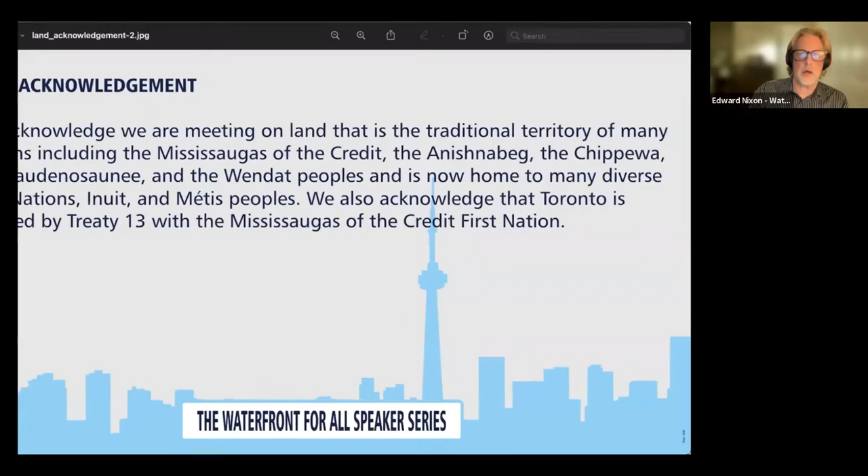We acknowledge we are meeting on land that is traditional territory of many nations, including the Mississaugas of the Credit, the Anishnabeg, the Chippewa, and the Haudenosaunee, and the Wendat peoples, and is now home to many First Nations, Inuit, and Métis peoples. We also acknowledge that Toronto is covered by Treaty 13 with the Mississaugas of the Credit First Nation.

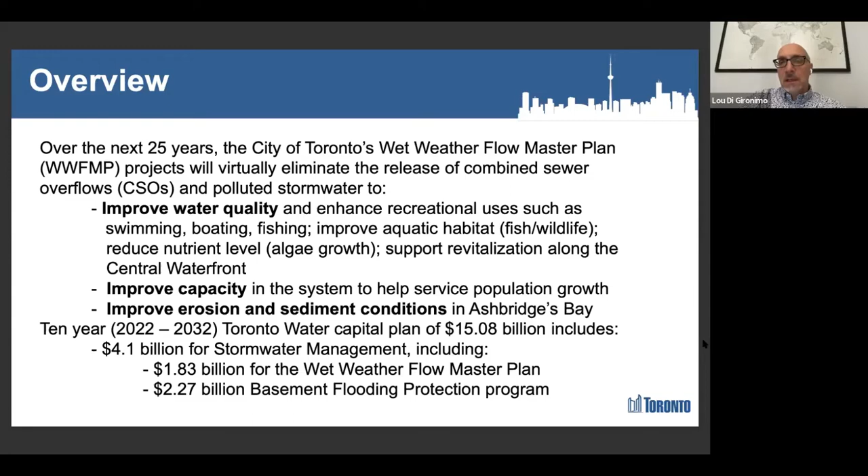The Toronto Water Capital Plan and Budget was just approved by Council in December. The new 10-year capital plan that Council approved is about just over $15 billion of work. As you saw in the introduction, we deal with drinking water, wastewater, and stormwater. Tonight I'm going to focus specifically on the stormwater components. In that $15 billion over the next 10 years, $4.1 billion has been allocated for stormwater management, with $1.83 billion going towards the wet weather flow master plan, and $2.27 billion directed to the basement flooding protection program. So next slide.

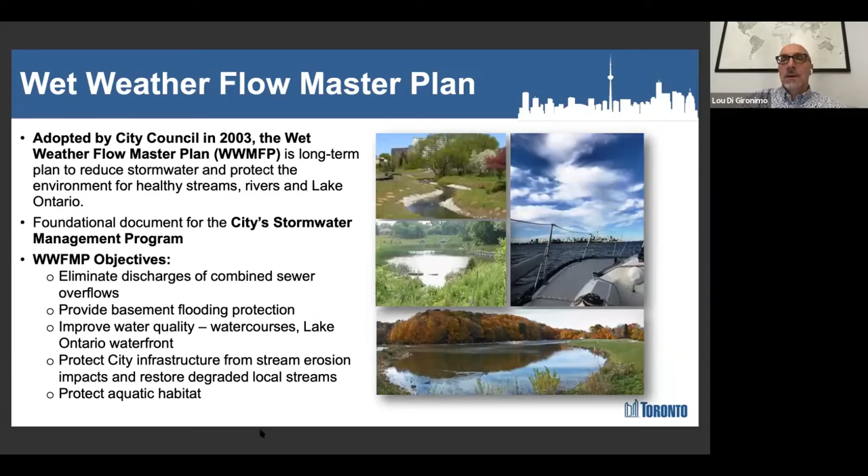The master plan, the original plan, was adopted by Council in 2003. It was always intended to be a very long-term plan with significant investment required over the years, and it became a foundational document for all our stormwater management programs throughout the city. It's designed to eliminate discharges of combined sewer overflows. It was also at the beginning dealing with basement flooding, but at a much smaller level. With storms in 2005, 2007, 2009, and subsequent storms that flooded more homes, Council significantly expanded that component of the wet weather flow master plan, which is why you see the number split between wet weather flow projects and basement flooding.

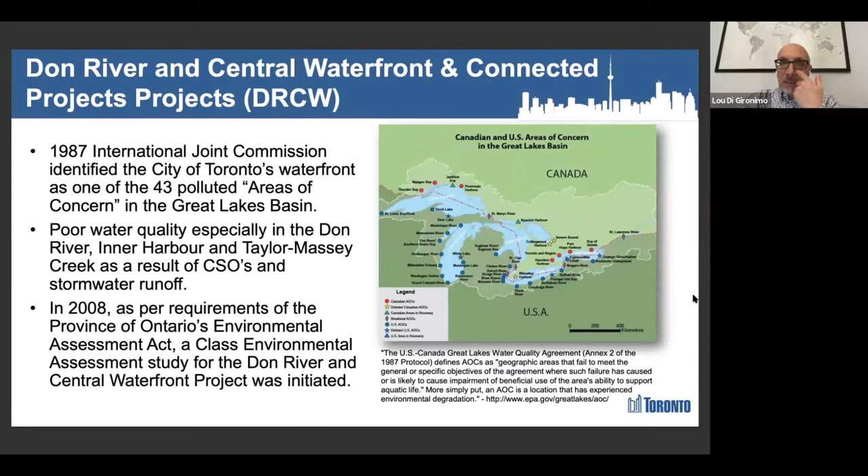The whole purpose of the wet weather flow master plan, and what we're going to focus on tonight as a component of that larger master plan, is the Don River and Central Waterfront connected projects. These projects are built out of an environmental assessment we did in 2008, focused specifically on trying to get the Inner Harbor delisted as an area of concern, as identified back in 1987 with the International Joint Commission. We believe that once all the work is completed, the quality of the water at the Lower Don and in the Inner Harbor will allow us to apply for delisting. Next slide, please.

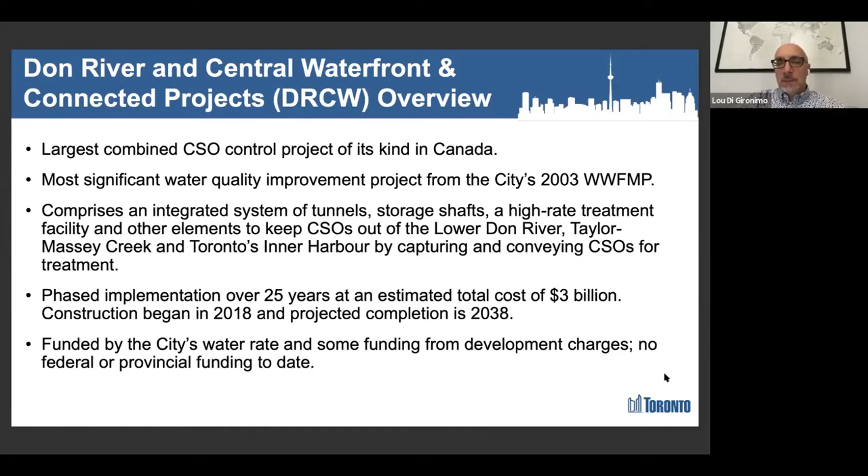The series of projects you're going to see tonight is the largest combined sewer overflow control project of its kind in Canada. It's the most significant water quality improvement project within the Wet Weather Flow Master Plan. It comprises a series of integrated tunnels, storage shafts, high rate treatment facilities, and other elements to keep combined sewer out of the Lower Don, Taylor Massey Creek, and the Inner Harbor, by capturing it and conveying it over for treatment. It was always planned as a phased implementation because of its order of magnitude. These projects total $3 billion, funded by the city's water rate with some funding from development charges. To date we've not received any federal or provincial funding towards these projects, although we continue our dialogue particularly with the federal level of government. Next slide.

Now, why do we keep talking to the senior levels of government? As I mentioned, the work that Toronto is proceeding with, and that we have earmarked and budgeted in the long run in our capital plan, is designed specifically to deal with priorities and initiatives that the federal government and the provincial government have identified many years over and over again.

These were Government of Canada obligations that they have with the US under an intergovernmental agreement to improve Great Lakes water quality. Tied to that Canada-US Great Lakes agreement is an agreement signed by Canada and Ontario, because Ontario is the lead on helping do the work within the Great Lakes Basin, particularly Lake Ontario and Huron. We were successful in this iteration of the renewed Canada-Ontario agreement to at least get mention of these sets of projects in the document. No funding with it, but at least we got mention.

So you can look into that document on page 47 and see that the federal government and the provincial government agreed to continue to promote funding of these infrastructure projects to move towards delisting those areas and having them removed off of the area of concern list.

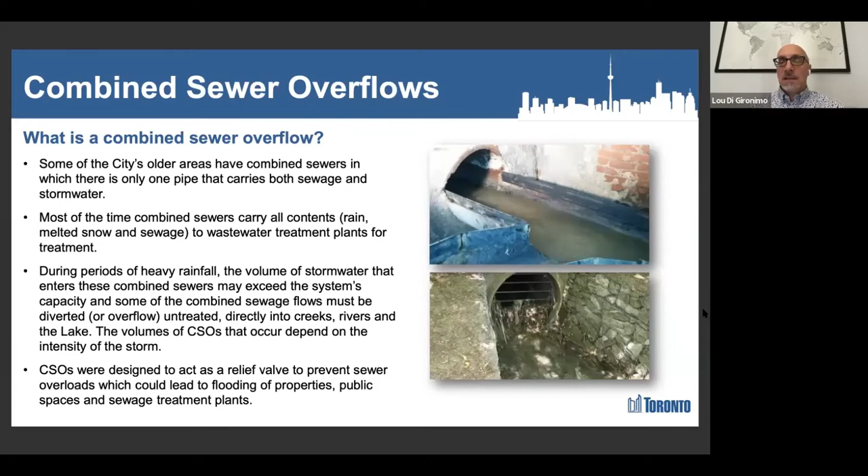Most of the time, that combined sewage flows into our treatment plants and gets fully treated at Ashbridges Bay, and the Humber plant also has some flows. However, during periods of heavy rainfall, when we see significant amounts fall, the system was designed to overflow, and it does. Think about it like a bathtub - the bathtub fills up and holds a significant volume of water. However, when you have too much water coming in too quickly, that bathtub starts to overtop, and that's what happens with these sewers. It was designed to act as a relief valve to protect property, so we don't have flooding in downtown properties and public spaces, and also to protect sewage treatment plants so they don't flood out and get damaged during these extensive rainstorms.

If we take a quick look at the sewer infrastructure, as I mentioned, combined sewers typically happen in the older parts of the city. We have 11,000 kilometers of sewer, but only about 1,500 kilometers are combined - 110 kilometers of storm sewers receiving combined sewer overflows during heavy rain. However, there are 310 locations spread throughout the city where the combined sewer overflow has regulators.

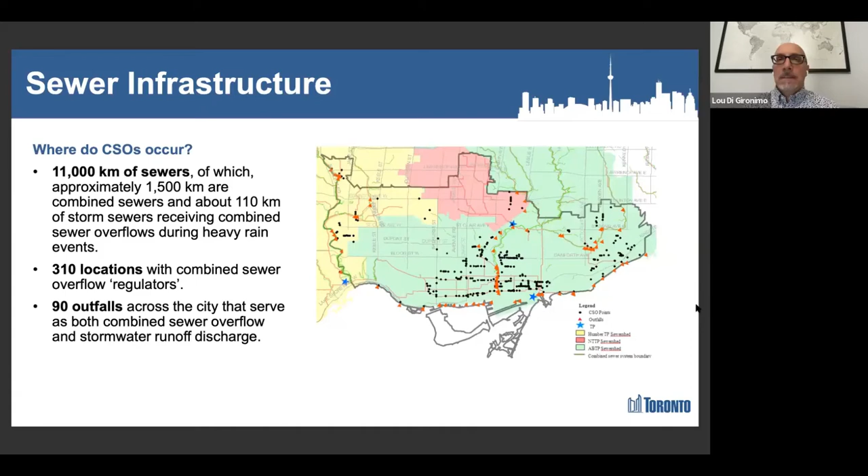So what are the impacts of combined sewer overflows? Well, the discharge contains nutrients and harmful bacteria and pathogens. They can contain some heavy metals, oils, pesticides, and other contaminants that you typically find in domestic sewage. Combined sewers contribute to the degradation of surface water quality in the Don River and in Toronto's central waterfront. The nutrient enrichment causes harmful algae growth in parts of the shoreline and in the lower Don, and has an adverse impact on fisheries and the health of aquatic biota and their habitat.

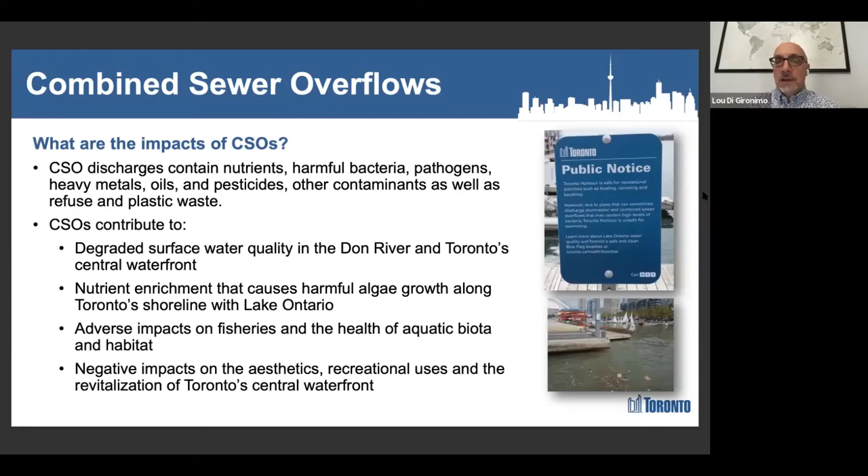So other negative impacts include the aesthetics. It impacts recreational uses, and is not a pleasant thing for the revitalization efforts for Toronto's central waterfront.

So how are we going about addressing this issue? The wet weather flow master plan essentially has two very large projects associated with it. The first is the Don River and Central Waterfront wet weather flow system, essentially three large tunnels, and I'll walk you through that. The second component is a landform project we've done jointly with the Toronto Region Conservation Authority.

It's to address some erosion issues by Ashbridges Bay, but it also will be the home of a future high-rate treatment facility that will treat the combined sewer overflows after we build the tunnels.

In addition to that, there's other work underway because it's all part of the same system. Other environmental assessments completed at Ashbridges Bay led to the development of a new integrated pumping station that services not only the new combined sewer overflow coming from these tunnels, but also helps us decommission the old pumping stations currently north of Lakeshore. Those will no longer be used in future and will be integrated into this new pumping station, which will handle dry weather flows, normal sewage, as well as the wet weather flow situation.

There's also a new outfall pipe being built, with larger capacity and better diffusion capability for improving discharge into Lake Ontario, as well as a new ultraviolet disinfection system, which will effectively eliminate the use of the chlorine tanker cars we have at Ashbridges Bay. We will still have to have some sodium hypochlorite in case we have to do secondary bypasses, but the primary source of disinfection in future will be ultraviolet disinfection. So we will significantly reduce the amount of chemicals we use before we discharge into Lake Ontario.

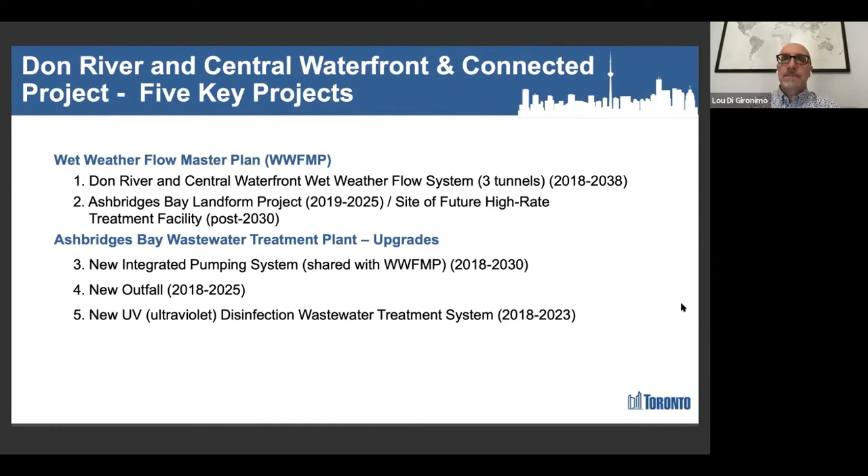So if we take a look at the Don River and Central Waterfront and connected projects, what area is it servicing within the city? It's essentially the central core, all the way up to Steeles Avenue. It services approximately 1.2 million people today, and we know that a lot of the high growth areas within the city are contained within this study area, so it will also handle continued population growth that we're seeing throughout this core.

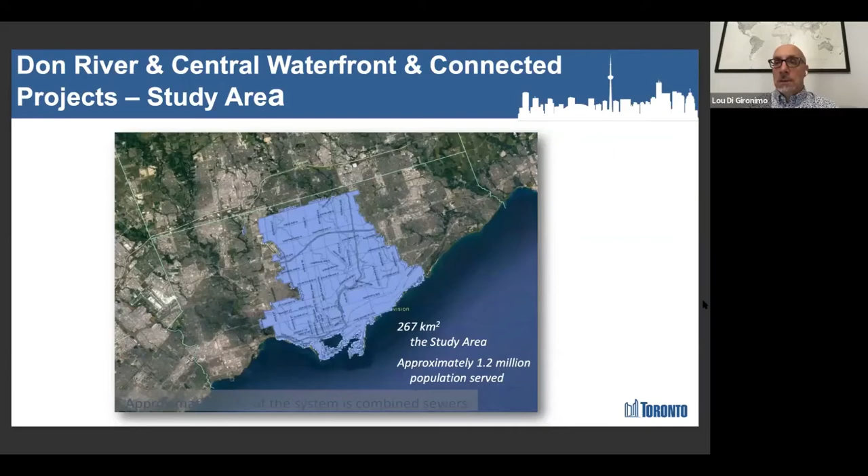So the specifics of the first set of large projects, the Don River and Central Waterfront wet weather flow tunnel system, is comprised essentially of 3 different stages. The red line you see is what we call the Coxwell bypass. That project is underway right now and being constructed. It is about 10.6 kilometers in length. The total system will be 22 kilometers in length, because that tunnel will continue with a smaller diameter tunnel working its way along Taylor-Massey Creek eventually, picking up additional combined sewer overflows.

And then another more important one is the Inner Harbor West Tunnel, which will be built also in a subsequent phase. It runs right across the Inner Harbor and connects at the western point to the existing Western Beaches system that we have in place and have been operating for the last 20 years.

So ultimately, when constructed, we will have tunnels protecting combined sewer overflows and storm overflows stretching from Sunnyside Beach all the way over to the treatment plant. Those stars you see are the locations where drop shafts will go in and pick up those overflows. If you remember that earlier slide where I talked about combined sewers eventually discharging into our tributaries, that's what those star locations are. We have to pick up that overflow and drop it down deeper into that tunnel.

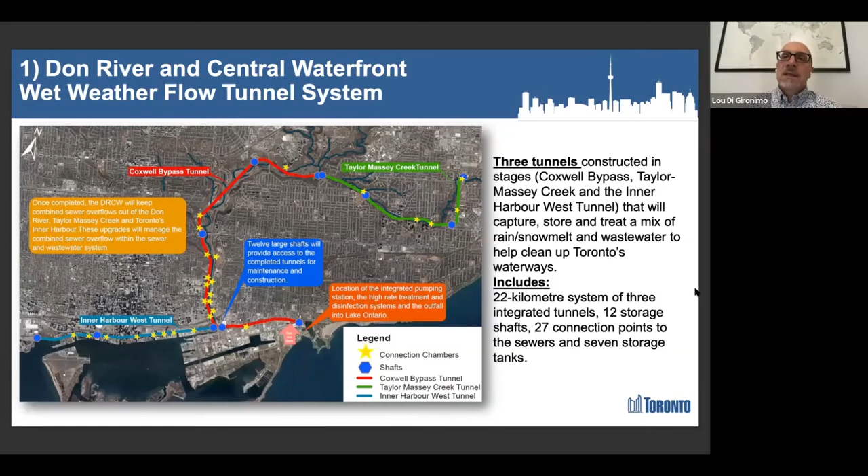The tunnel is being built. If you go on the next slide, you're going to see some of the pictures we've got underway with construction. Please advance another slide.

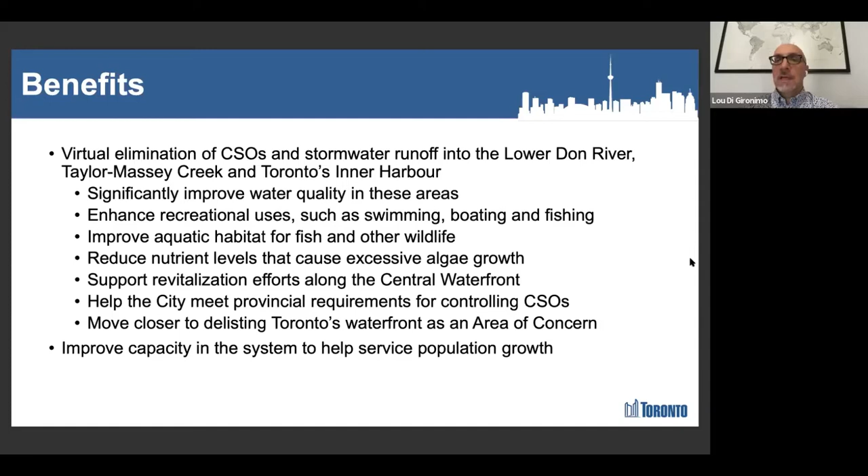So I talked about some of the benefits. It's going to eliminate the combined sewer overflows and stormwater runoff from the Lower Don, Taylor-Massey Creek, and the Inner Harbor, all leading to improved water quality, enhancing recreational uses such as swimming, boating, fishing, improving aquatic habitat for fish and other wildlife, reducing nutrient levels, everything that we talked about. These tunnels are intended to address all of those concerns, as well as improve capacity in the system to service future population growth.

If we go to the next slide, these tunnels are quite large, 6.3 meters in diameter. The Coxwell bypass in particular is interesting because, even though it's running through the Don River, it does connect at the top of the Coxwell sewer. The Coxwell sewer runs straight down by gravity from a location in the ravine into the treatment plant.

That sewer was put into service in 1960 and it cannot be taken out of service. We had to do an emergency repair on that sewer back in 2009, 2010, and it was quite expensive, costing us over $40 million to fix a segment of that sewer.

To be able to continue to maintain that sewer in future, you need to be able to bypass those flows and redirect them temporarily while you do maintenance work. The combined sewer tunnel we're building on the Don will act primarily as a combined sewer capture system, but it can also be used to bypass the Coxwell for a period of time, so we can isolate that sewer, get in there and do maintenance work, and then revert the flow back to the Coxwell sewer. So it's going to do dual duty.

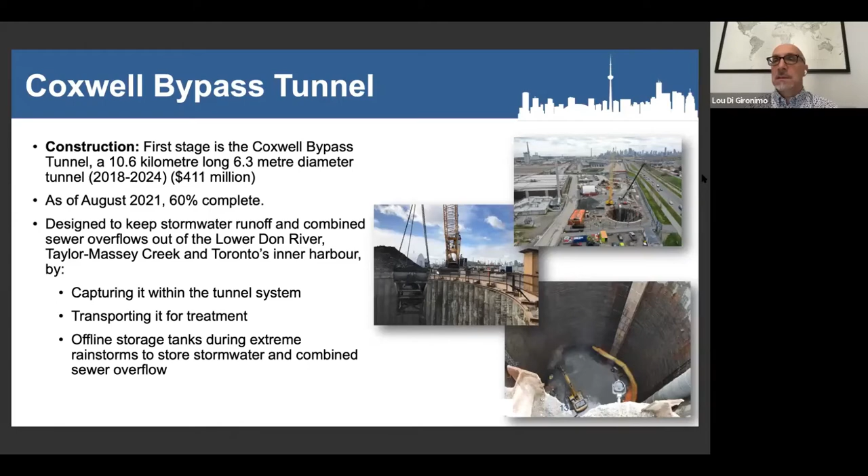It's about 60% complete and about 50 meters deep as well. So that's what you're seeing in some of these pictures, with the storage shaft looking straight down. This is one of the entry shafts we have, and it runs about 50 meters all the way along.

The Coxwell sanitary trunk sewer is the system that we will be able to bypass. Why is it so important? It's the most critical sanitary sewer we have in the city. It carries sewage for over 750,000 residents and businesses. As I mentioned, it has never been out of service, and you can't take it out of service until this bypass is built. The new tunnel will enable that redundancy to happen and give us greater protection for the city on a go-forward basis.

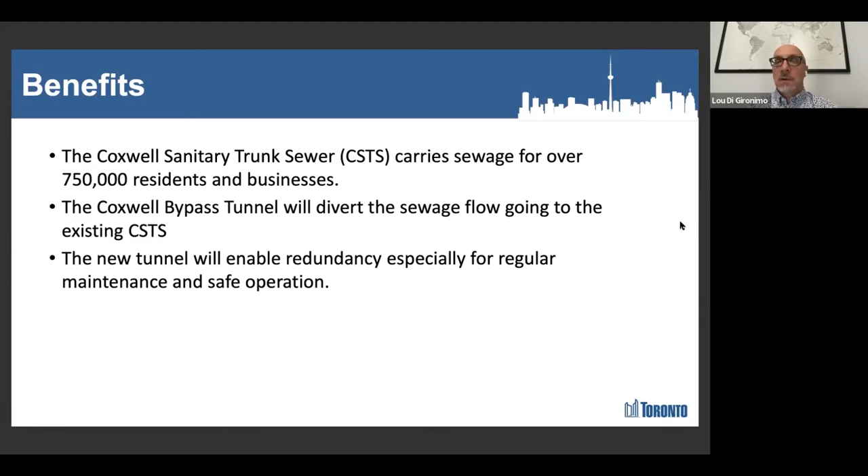Those starred locations, those outfalls, are primarily at surface grade. So we do have to tunnel a much smaller shaft, smaller in diameter, but it has to go all the way down 50 meters and connect into that tunnel. So there's a lot of complex tunneling work to be completed over the course of the next couple of years.

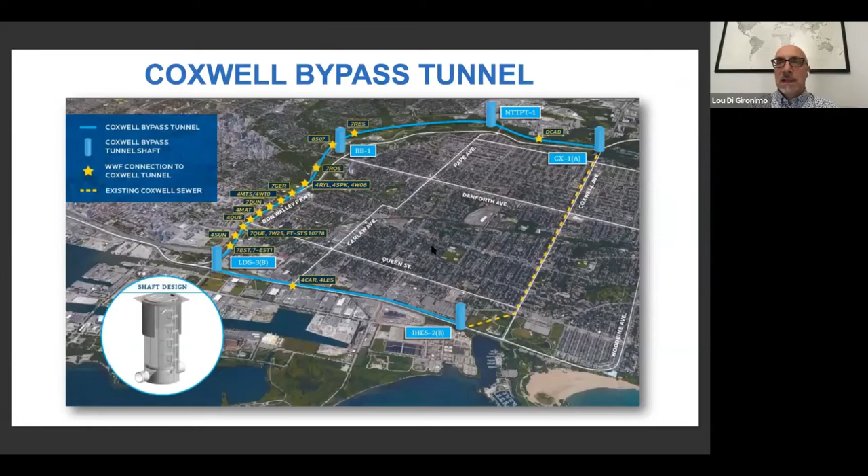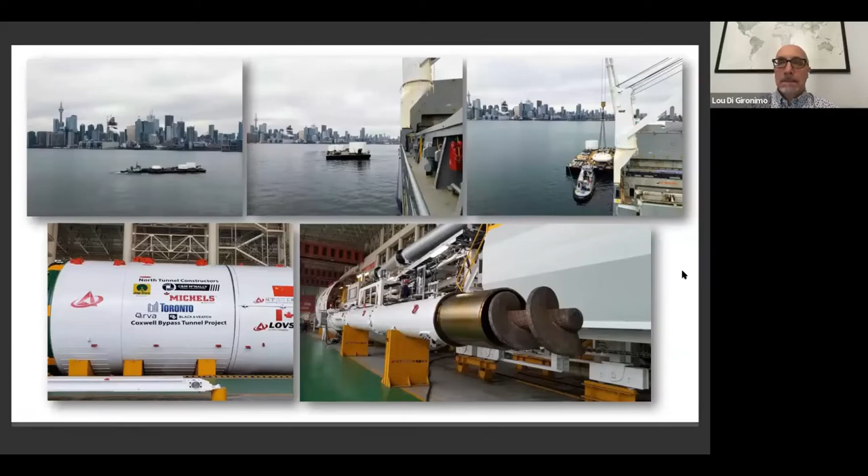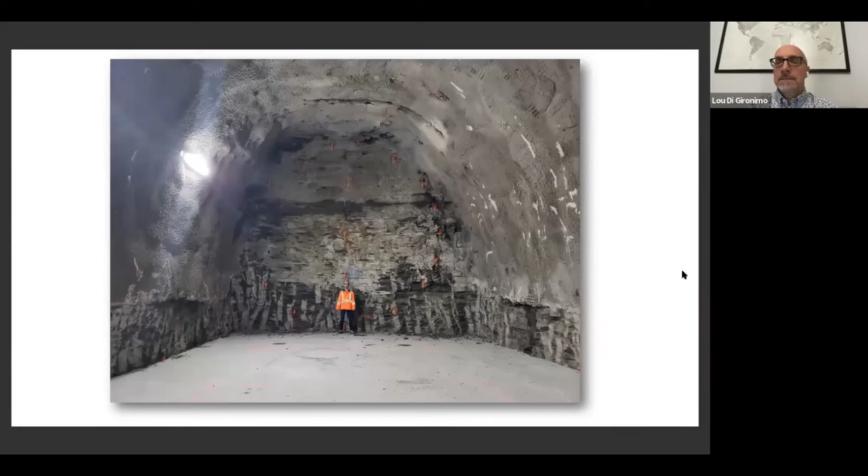The Inner Harbor West Tunnel is a subsequent phase. We're in the preliminary design stage for those sets of projects. We have completed the EA, and we'll have 3 shaft locations: one at the Strachan Avenue area, where the Western Beaches tunnel ends, right by the Inukshuk; another shaft location at a parking lot at Rees Street in Queens Quay; and then another twin shaft at Keating, right at the foot, at the mouth of the Don.

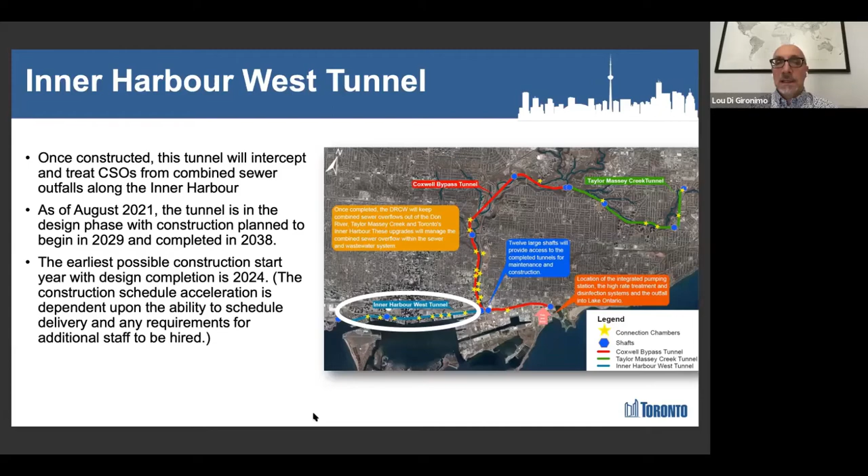This set of projects also includes interconnects that need to be built, which will pick up all of the overflows typically found in the various piers and quays along the Inner Harbor. This work, coupled with picking up all of the overflows in the Lower Don, are the key components of getting the city delisted as an area of concern.

The Taylor Massey Creek component will be a smaller diameter tunnel. It does not need to be as large, as the flows at this part of the city won't be as large as we have in the Inner Harbor and the Coxwell, but it's still important to pick up those combined sewers, as they do cause degradation within Taylor Massey Creek. So that will also be constructed in subsequent phases.

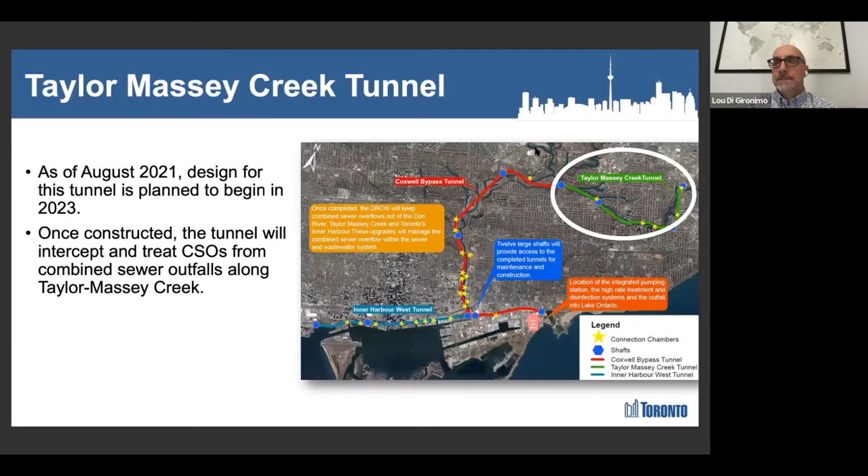The second set of projects associated with the wet weather flow master plan is the Landform project and the high rate treatment facility. Just the Landform project alone is about $98 million of construction.

As of this August, we were 38% complete. It is a joint initiative between the Toronto Region Conservation Authority and City of Toronto. It will improve erosion and sediment control to improve passage for boats in and around Ashbridges Bay, in particular the sailing clubs in that area.

It eliminates the need for regular dredging of Coatsworth Cut. The construction is located south of Ashbridges Bay. We had owned a water lot there for many years, so we're building it on that water lot, and it will house a new high rate treatment facility and stormwater wetland facility.

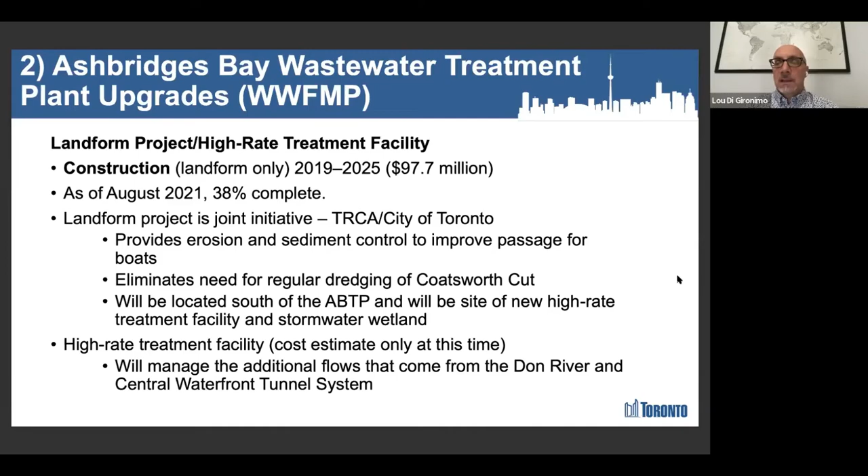We are in the early conceptual design stages for those two projects. We really have to build everything else first, and those will be the final set of projects that go in. The high rate treatment facility, we don't have a cost estimate yet at this time, as we continue to look at different treatment technologies and assess their performance. We're looking at various systems across the globe to see if we can find technologies that make sense for us to use in Toronto.

So here's a schematic of what we were going to construct. We are constructing a lot of aquatic habitat improvements associated with the cells. These were designed closely with the Toronto Region Conservation Authority, as well as the Department of Fisheries at the federal level.

Once completed, and there's the schematic drawing, you can see the actual construction as of this summer. Those groins are starting to be formed, and it's going to provide excellent fishing areas for people in the city.

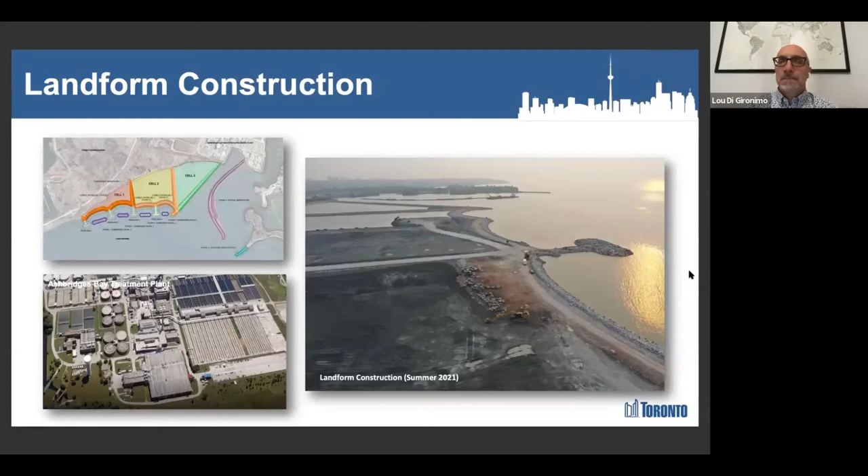Now we get into a set of projects that are associated with the Ashbridges Bay treatment plant, but are integral to putting in place all the protection we need for the wet weather flow projects. So the integrated pumping station that I referenced, most of you will not see much of it until we start building the structure above ground.

There's lots of work going on in various phases. We're in the second phase. This work will be completed in three stages, and that third stage is when you will start to see a structure finally. It's located on the south side of Lakeshore, close to where you will see the water tower at Ashbridges Bay.

It is quite a complex project. As I mentioned earlier, it's replacing two current pumping stations that presently exist north of Lakeshore. Many of you see those structures. One of them is a round building, another one's a much older red brick structure. It was put in service in 1915.

When we did assessments of the technologies in place there, as well as the condition of those pumping stations, essentially the engineers told us they didn't know how we could refurbish those just the way they were constructed, primarily the older pumping station. So we needed to build a new pumping station, and it made sense to marry it up with the wet weather flow projects, hence the ingenious name of calling it an integrated pumping station, because it is addressing two different issues. Lesson learned: never let engineers name projects for you, because they're not too exciting.

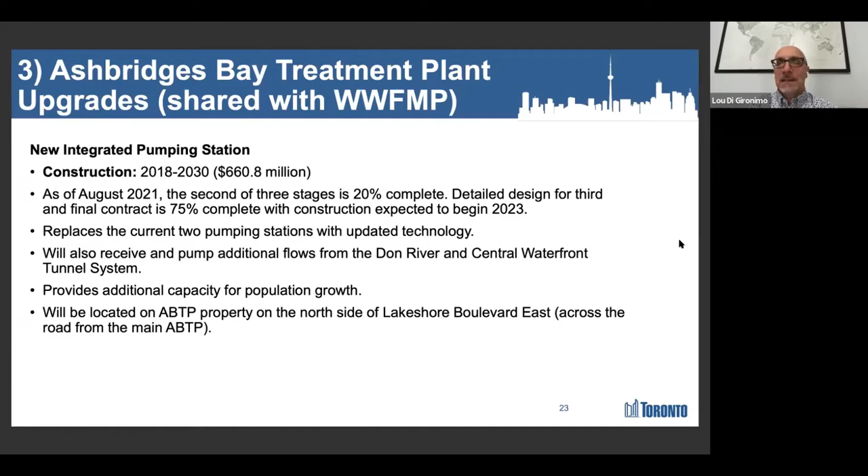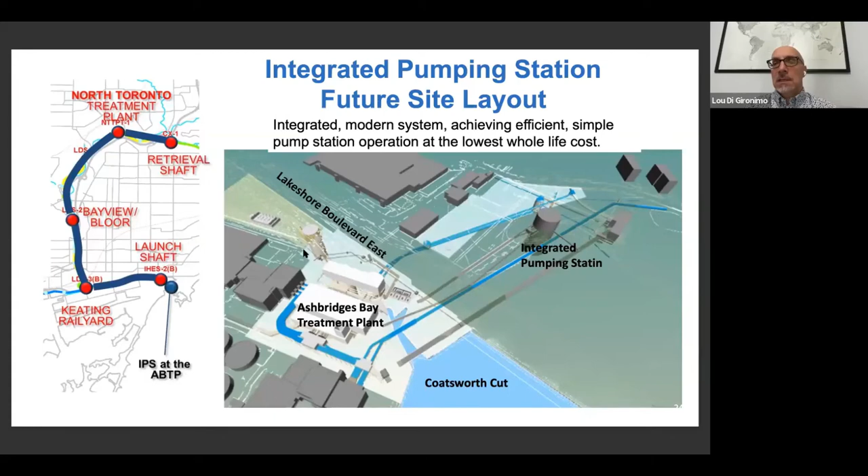The reason we can do that is most of the combined sewer overflows, when we analyze the strength of it, is essentially contaminated stormwater. It's very dilute sewage. Pushing it through a treatment plant not only uses up capacity but uses a lot of extra chemical and energy to treat this diluted stormwater or contaminated diluted sewage. This gives us the flexibility to decide which treatment technology we should use based on the strength of the sewage we're dealing with.

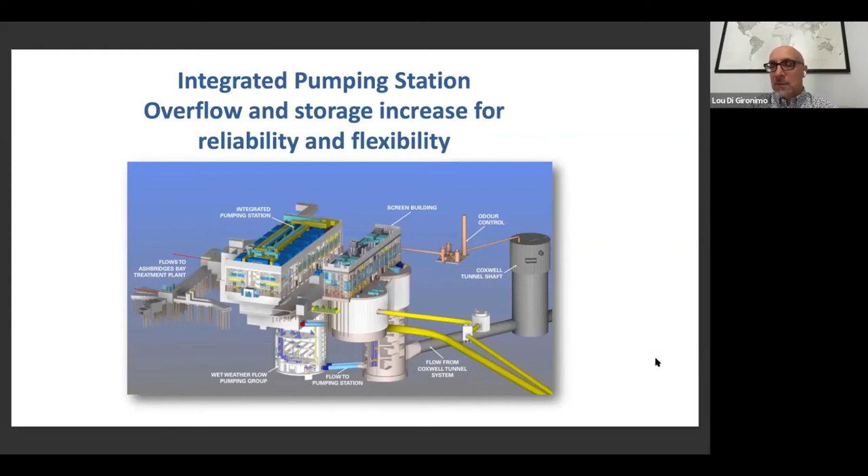The next key and large project to be built at Ashbridges Bay is a new outfall. The outfall essentially takes all of the treated flows out of the plant into Lake Ontario. This project is also underway and is about 40% complete. It's a $279 million project. It will provide additional capacity and replace the existing outfall that was built in the 1950s. From a water quality perspective, it's also designed to improve the way it mixes in Lake Ontario.

The existing outfall is under 1 kilometer away from the shore. The last 92 meters of it has the diffuser ports located at the bottom of the lake, and what you get is an interference with the mixing zone, as they call it, as the effluent mixes with Lake Ontario. You can get some interference along the shoreline or the near shore areas.

The new outfall has much larger capacity. It's designed actually to match the inflow to the plant. Right now, the existing outfall does not match the total flow coming into the plant, and we have to bypass through another location called the seawall gate. We have to do what's called a secondary treatment bypass occasionally during heavy rainstorms. With the new outfall, we should virtually eliminate that from happening in future.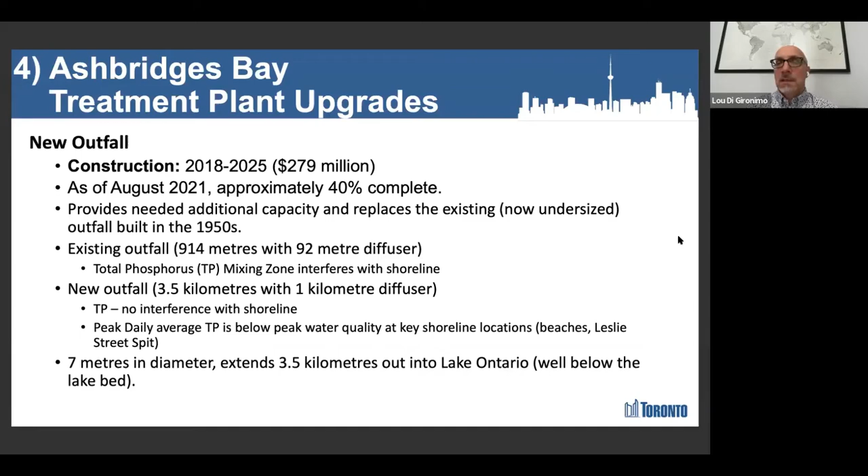So we take a quick look at this. There's a deep shaft that's constructed at the Ashbridges Bay site. The tunnel boring machine is working its way out towards the location of the risers. The risers were put in place over the course of the last couple of years using a barge system. If you are boaters, you might have seen a barge configuration. It looked like it was drilling for oil out there. They weren't. They were drilling the risers into the ground and placing them in line, through the soil, the bottom of the lake bed, and into the bedrock to the depth just above the tunnel location.

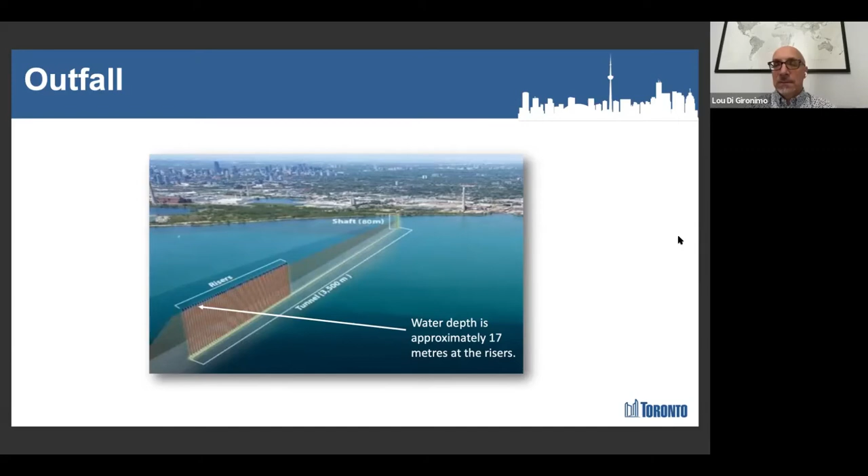So if we take a look at this schematic, here's a better representation. This shaft's a little deeper than the other shafts. This is about 80 meters down, all in bedrock. As you can see, the risers will sit at the bottom of the lake bed.

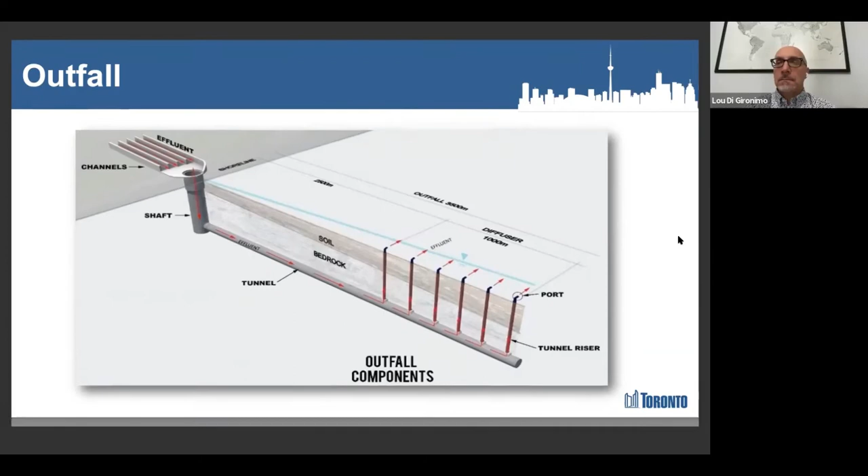The final project is the disinfection system, located at the south end of the plant, just before the deep 80-meter shaft that goes into the outfall. So before it goes into the new outfall, it will be treated in this new ultraviolet disinfection facility.

It's also under construction, about 56% complete, at about $214 million. It provides reliable disinfection as part of the full wastewater treatment process without using additional chemicals, so chlorine tanker cars will no longer be used. They've been used for decades, but we will not use them anymore.

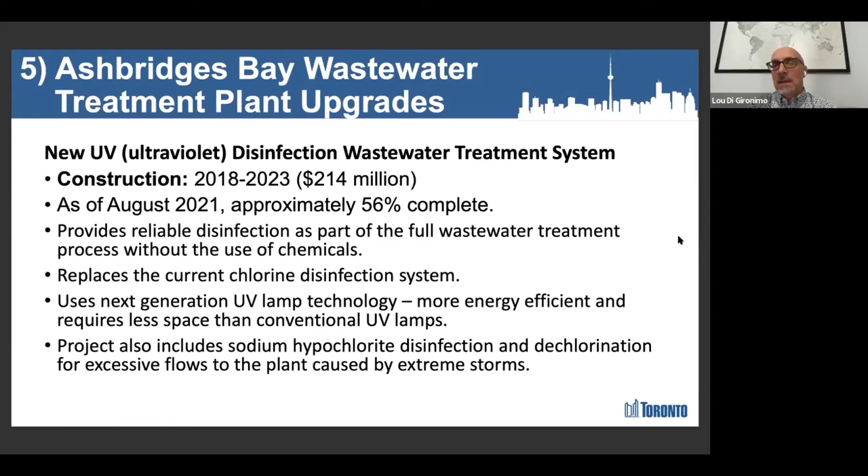The design uses a new generation ultraviolet lamp technology, which is much more energy efficient and requires less space than the original first generation or conventional UV lamps. As I mentioned earlier, the project still includes the use of sodium hypochlorite, essentially a strong bleach disinfection and dechlorination system, to deal with any excess flows in case we need to bypass a portion of the plant during extreme storms.

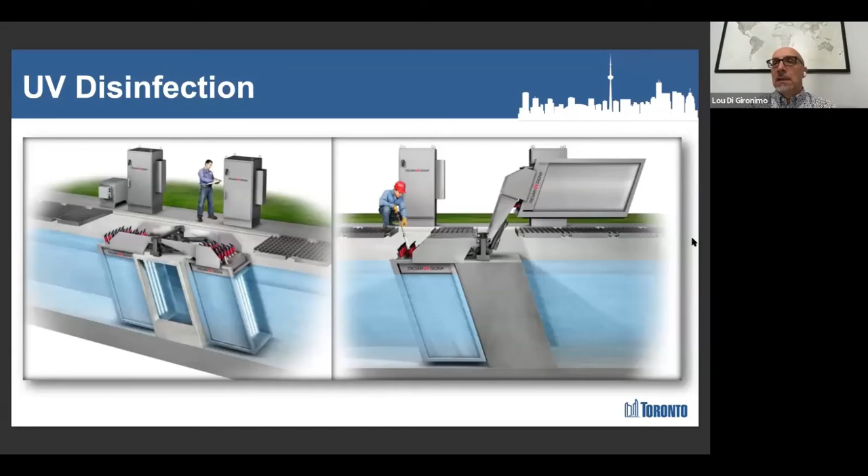Here's a quick look at the UV disinfection system. The ultraviolet bulbs will be placed in line and will disinfect the effluent as it flows through these channels. The control panels are above, and we can lift those light bulbs out for cleaning, replacement, and maintenance purposes.

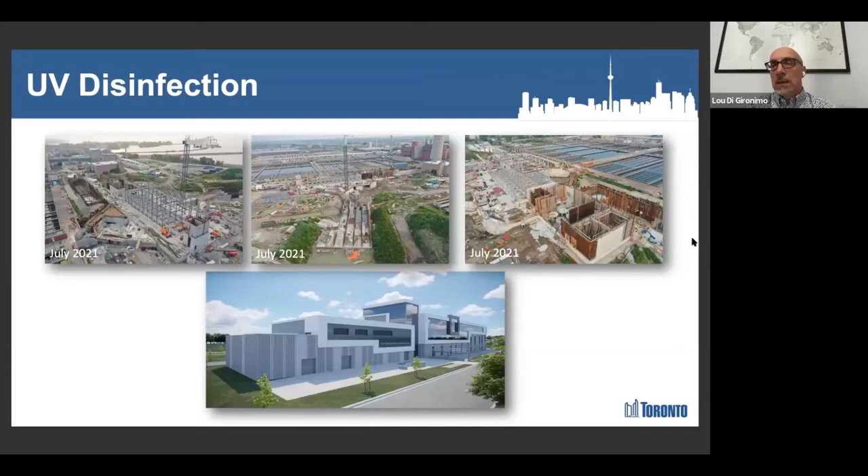Here's some pictures of that facility being constructed, as well as an artist rendering of it being fully completed. So this is a new building to be located at the south end of our treatment plant.

So all of those projects, why are we doing this? Why are we spending all this money? Well, it's going to provide multiple long-term benefits for the city. It works towards delisting, as I mentioned, keeping combined sewer overflows and stormwater runoff out of the Don River, Taylor Massey Creek, and along Toronto's Inner Harbor. It upgrades technology and capacity to pump stormwater and sewage for treatment, and it upgrades the capacity and location where treated wastewater is discharged, especially important during heavy rainstorm events.

It also provides erosion and sediment control near Ashbridges Bay, and replaces the current chlorine gas disinfection system with a new technologically advanced ultraviolet disinfection system. It improves beach water quality, which will hopefully lead to the continued Blue Flag program and further improvement of some of the city beaches in and around that area.

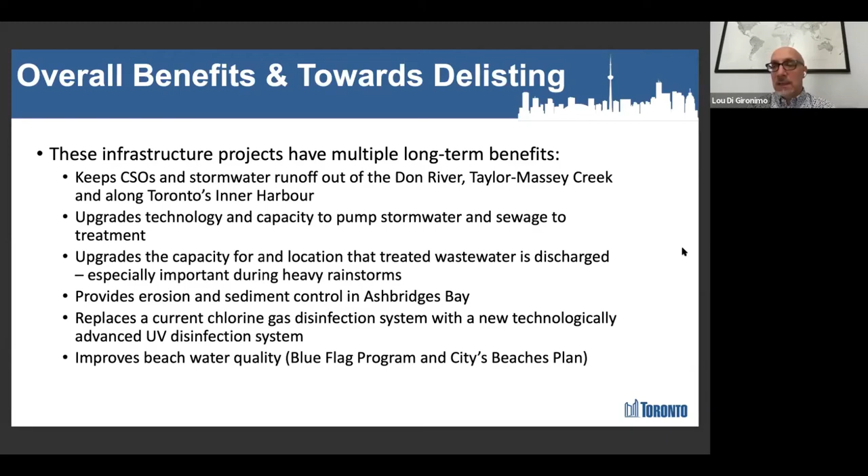Okay, that's the presentation.

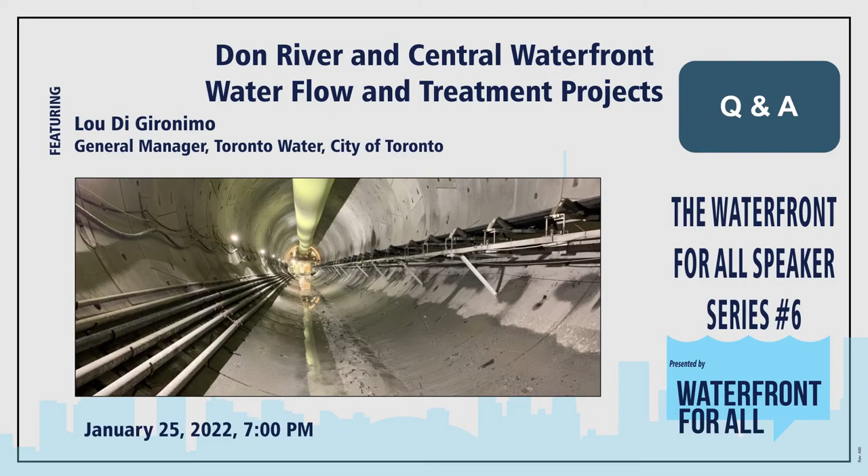Before we get into our lead off, if you don't mind Ed, I was just very curious about one thing you said regarding the Ashbridges Bay work. Am I correct in thinking, Lou, that when that's all done, people will be able to walk around the exterior perimeter there? Will it provide new access to the lakefront?

So part of the work we've been doing is looking at how we connect it to the Tommy Thompson Park area, because the new landform is built right beside that location. Ultimately we do want to provide some path areas for people to walk along, essentially along the shoreline. We need to keep people out of the treatment plant area, of course, but the way we designed this was to try to create some public access areas along the shoreline first. Depending on who else is involved and who wants to do more, by building what we built, you get much closer also to the eastern side of Ashbridges Bay.

So one could conceptually look at someone coming along now, and it would be a lot cheaper now if you wanted to connect through a bridge crossing over Coatsworth Cut. But that's not part of this project. We are going to just focus on the water lot area where we are right now.